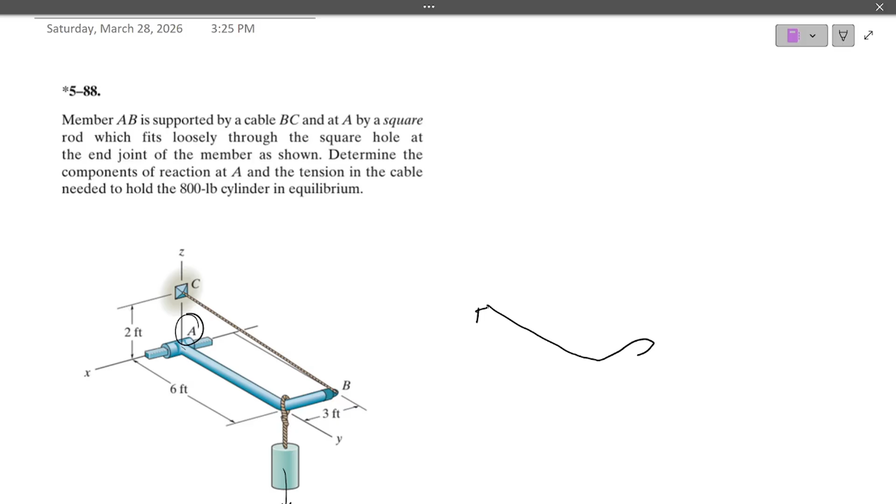So the free body diagram I would use is creating this rod 3D. I think it might be helpful to show it 3D like this. And there is a force from the cable. I'm just going to either cut the cable, or we can also just say this force right here, FBC. I will use coordinates just to make it very clear.

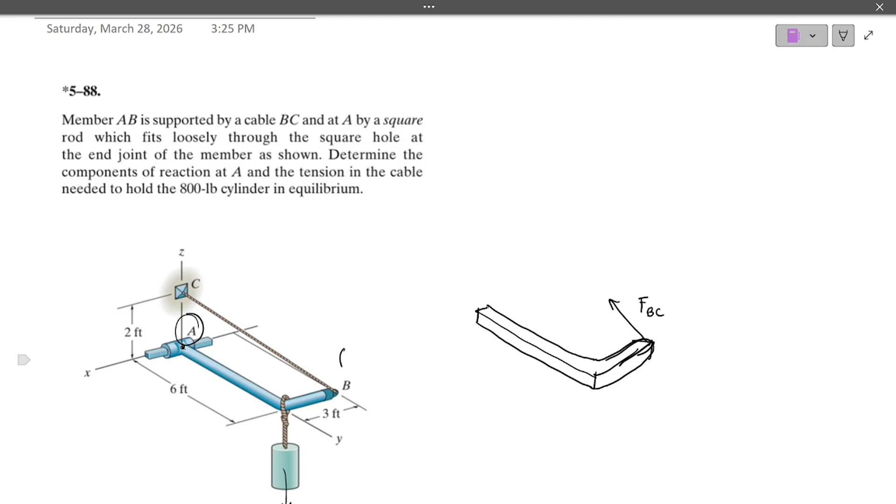So we have 0, 0, 0 here at the middle, point A. Then to get to B, it is -3, 6, and 0. Point C, it is going to be 0, 0, 2. And we also need the unit vector from B to C. So let's start by defining all of the reactions. We have a reaction here going down 800 pounds.

And then at the end here, we will make this clear with the X, Z, and the Y-axis. So there is an AZ, and we said there's no AX because it can slide along that direction, but there is an AY. And for the moments, we're going to draw them. I'll try drawing them in this color.

With the right hand rule, we're going to say the curl of our hand is like this, and our thumb points that way. So that means our fingers are curling that way, and our thumb is pointing up. This will be in the positive direction of Z. So we'll call this MZ, the moment at A in the positive Z direction. Then we have a moment in the Y direction.

So if my thumb is pointing that way, my fingers would have curled like this. So this is the Y, positive. Our fingers go like that. That is MAY. And it can also be counteracting this force. We'll just predict it. So instead of this AY pointing outward, we'll do the AY pointing the other way, because you can kind of guess the cable's pulling back. So we want to counteract that with the AY pointing the opposite way.

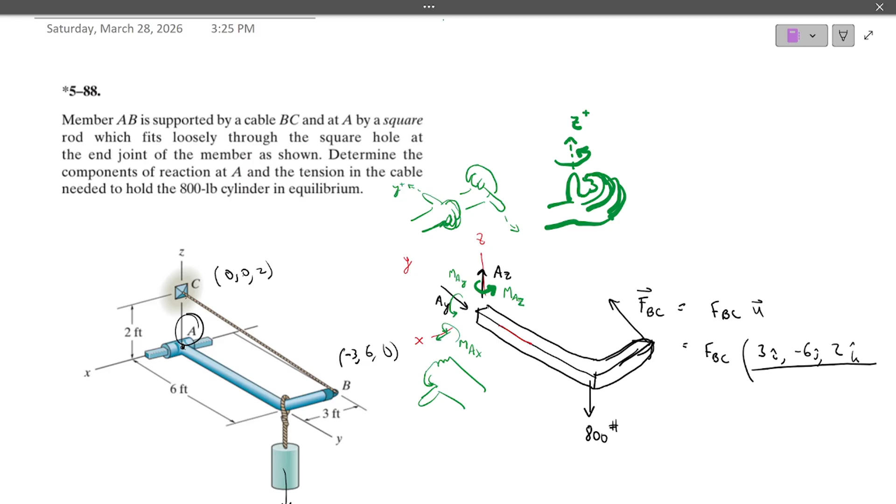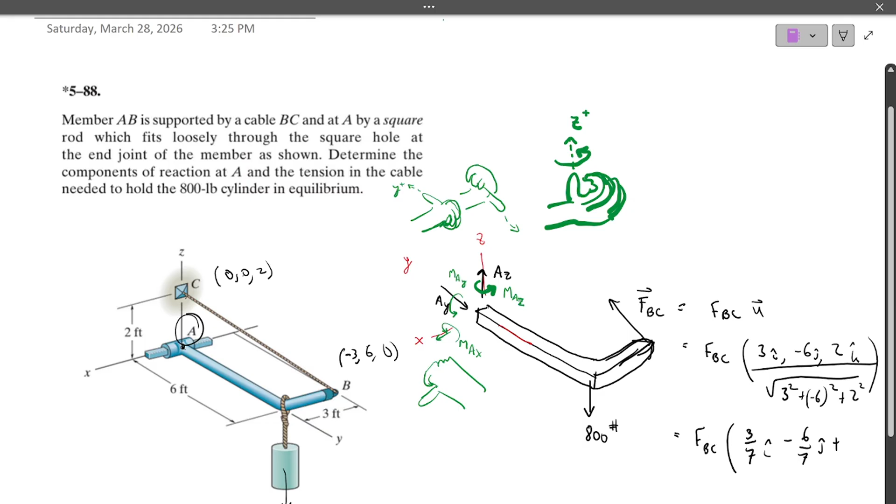We have 0 minus -3, which is 3, 0 minus 6, which is -6, and then 2 minus 0, which is 2. All of that, so we'll call it I, J, K. All of that divided by square root of 3 squared plus -6 squared plus 2 squared. So all of that will be FBC 3 over 7 I minus 6 over 7 J plus 2 over 7 K. And we have our FBC.

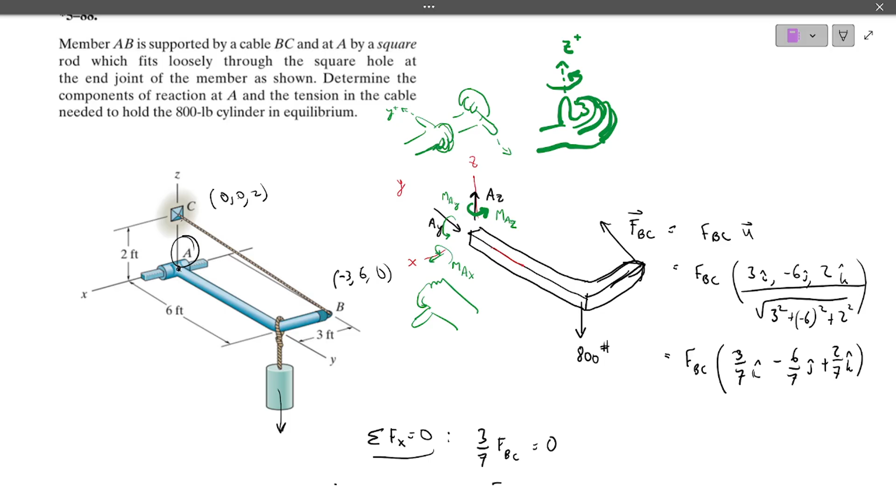Now we'll use the equilibrium equations. So we want to find the reactions and the tension in the cable; again, we can do sum of forces x, y, z. So going through sum of forces in the x, that means we'll take the x component of FBC, and then there's no x component anywhere else. We'll do 3 over 7 FBC equals 0. So I'm taking the x component from this vector here, equating this part equal to 0. That means FBC equals 0.

Let's do the other equations. Sum of forces in the y equals 0. So again, let's look at the y's. There is AY. There's also this y component of FBC, but that was 0. So we got AY equals 0. Then sum of forces in the z direction, we have AZ, and that will be pointing up. Then we have a minus 800 pointing down. AZ equals 800 pounds.

Now we'll take the moment about the x-axis. I'll do it over here. Sum of moments about the x-axis equals 0. So along the x-axis here, we have our moment in the x direction, and we also have a moment caused by this 800 pounds, and then FBC we said is 0. So theoretically that will be like 0 times that moment arm, which is 0. So I'm going to focus on the moments that I see.

There's 800 pounds times 6 feet. The right-hand rule will say fingers curl like that, thumb goes that way, and that is in the negative x direction, so negative. And then we have our MAX, and we assumed it's in the positive x direction, positive MAX. All of that equals 0. There's no other thing in the x direction; these MAYs, MAZs are in the other axes. Okay, that means MAX equals 4.80 kip feet. That's that 800 times 6. I can make it into kip feet. And then let's do the other ones.

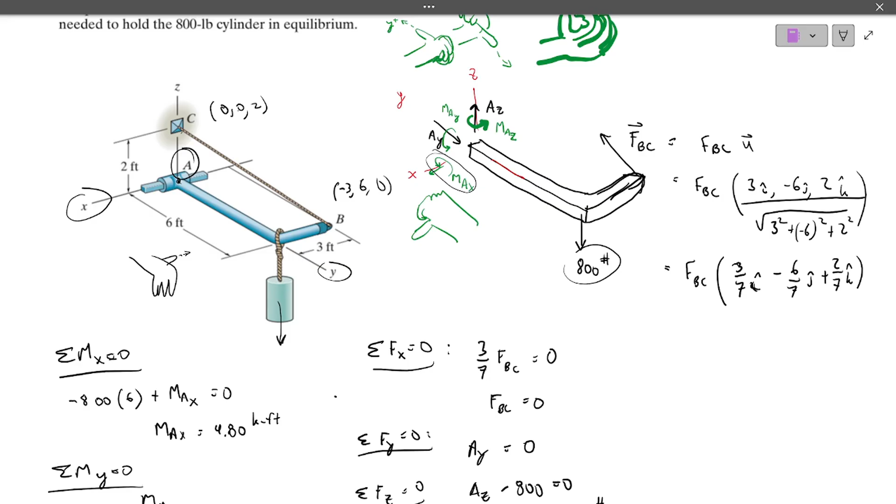So for this last point, MAZ, there's a force pointing down, but it's parallel to the z-axis, so it doesn't cause any rotation. So if we have the z-axis like this, and then we have a force pointing down, there's no rotation along the z-axis. It has to be perpendicular to the axis. So we had the x-axis earlier, like this in 3D, force pointing down. There's a perpendicular distance to this x-axis, but there's no perpendicular distance in this case to a z-axis. So when it has a parallel force, that means there's no moment. And so there's no other thing acting in the z direction, so MAZ equals 0.

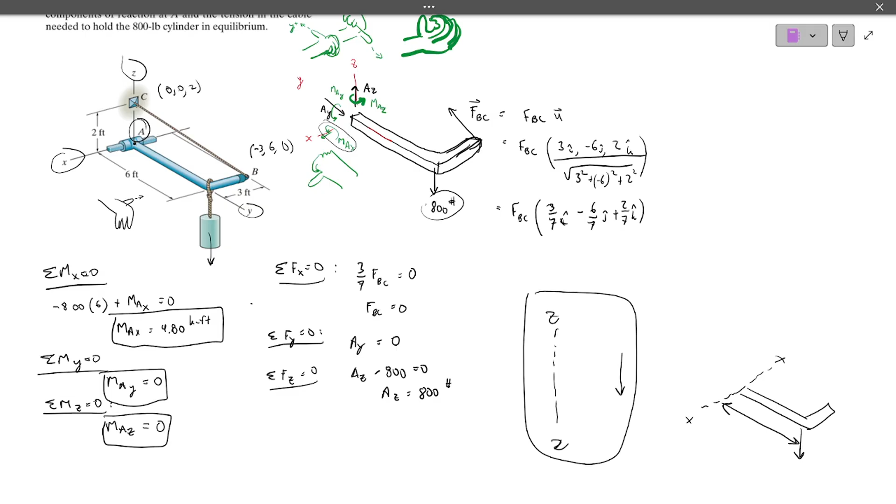So our answers will be here: MAZ equals 0, MAY equals 0, MAX equals 4.8 kip feet, and our force FBC equals 0. So that means in this cable, there's no force being felt due to this 800-pound cylinder going down. It looks like most of the reactions are happening at A,

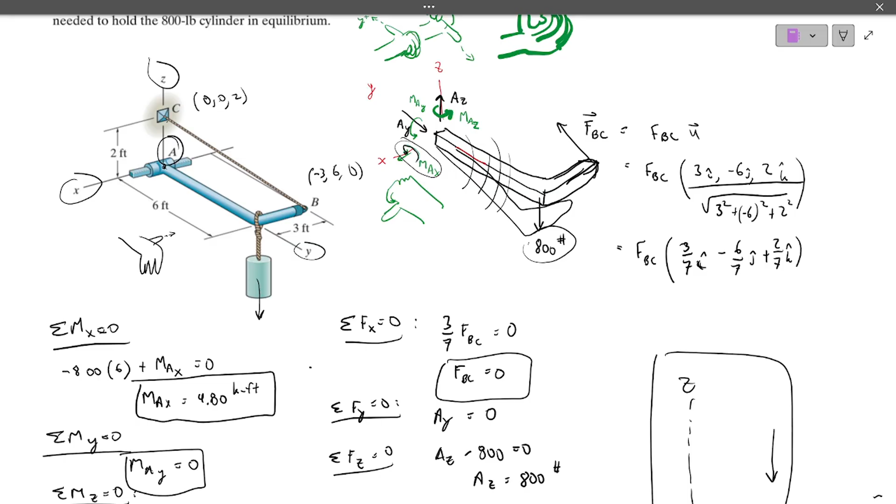and the rotation happening is in the M_Ax direction. So this force pulling it down will cause the rod to rotate; you can kind of tell if you draw it. It's causing it to fall down like this. That's happening in this M_Ax. That counteracts that falling. Then M_Ay and M_Az have no rotation along those axes, so there's no M_Ay, M_Az. That would be the answer.